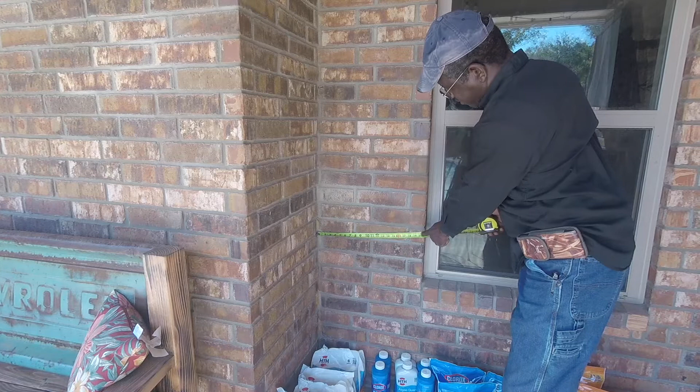One of the things here, this is 20, this is about 21 here. I'm gonna make it 20 that way, and then let's see, we've got probably right at 24 here.

So what I'm gonna do is try to stay within this section here. It'll be 20 inches across, 24 that way, and then probably make it about 36.

So if I make it about 36 tall, then about 18, which is about halfway, I'll probably put a shelf down at 18 inches. That way it'll have two levels.

I have some old reclaimed metal, so I'm gonna clean it up, get it measured, put it in the jig, and weld it up. I hadn't decided, since there are chemicals involved, whether to use expanded metal.

If I use expanded metal, I'll put a rubber cushion on there so it won't rust. If I decide to use wood, then we'll go the other route.

Right now I have reclaimed metal, 1x1 square tubing, very light because it's 14 gauge, and I already have expanded metal. If I use wood, I'll have to go buy some. But that's what we're gonna do here.

And then put all this in a pile and get it off the floor. So we'll see what happens. Okay, so that's kind of the idea I had.

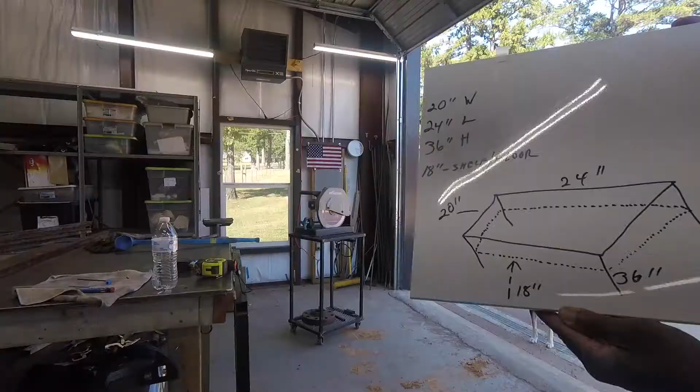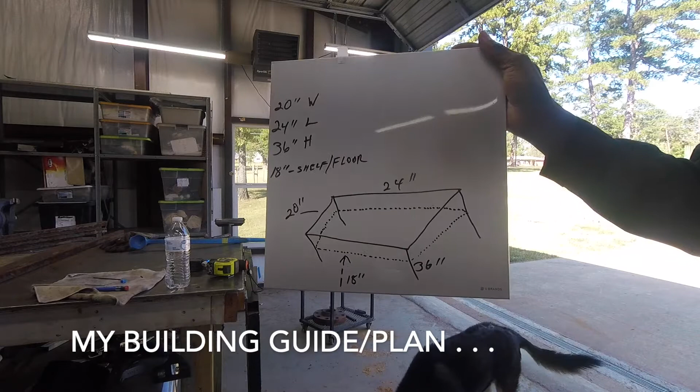That's just my rough draft there out of my brain, freestyle with just a black marker. Probably do better if I used some computer software, but I decided to do it like that.

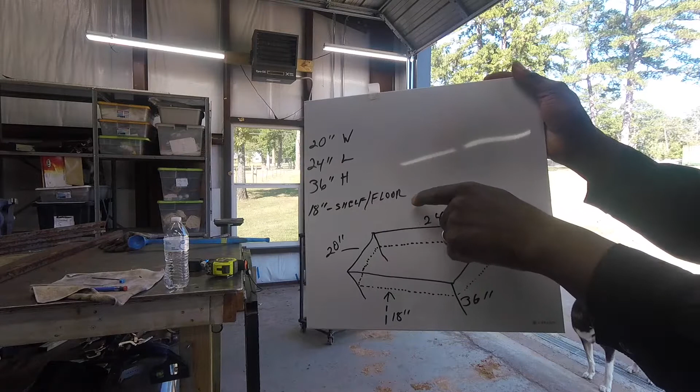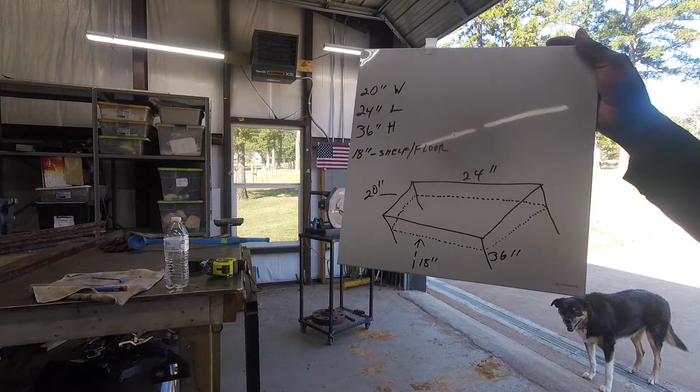Like I said, 18 inches from the floor will be my shelf, and 36 inches high from the top down to the floor, 24 long and 20 inches wide. Hopefully it'll come out like that when I get finished. If not, we can always cut it up and try something else.

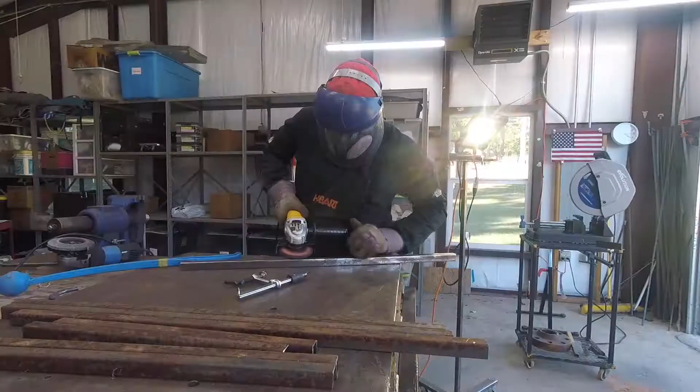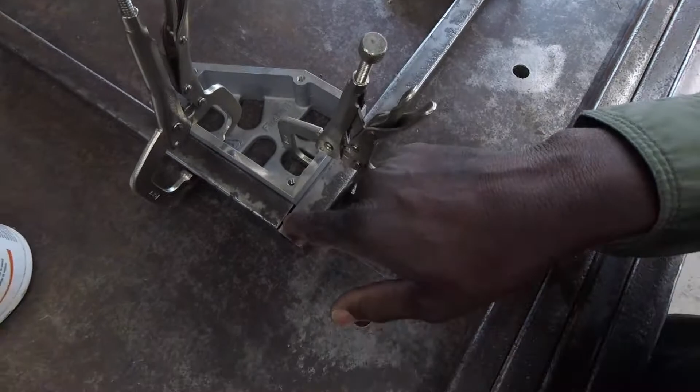All right, I'm gonna put a tack here, and probably on the outside. On the inside, I'm not gonna put anything because I'm gonna take these, put them in the corner, and tack those in the corner.

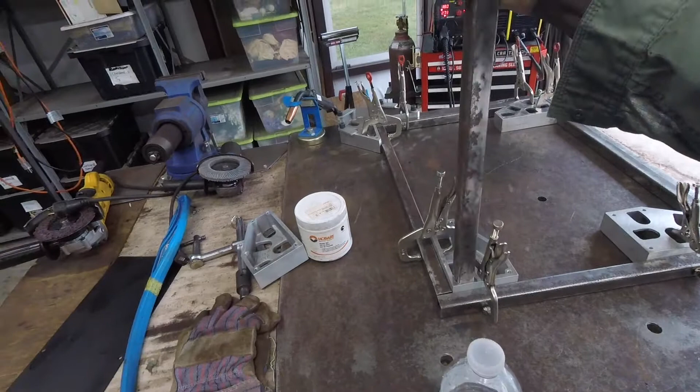So I don't have to grind the inside off, I'm not gonna worry about that. That way it'll fit flush up, it'll fit flush like that.

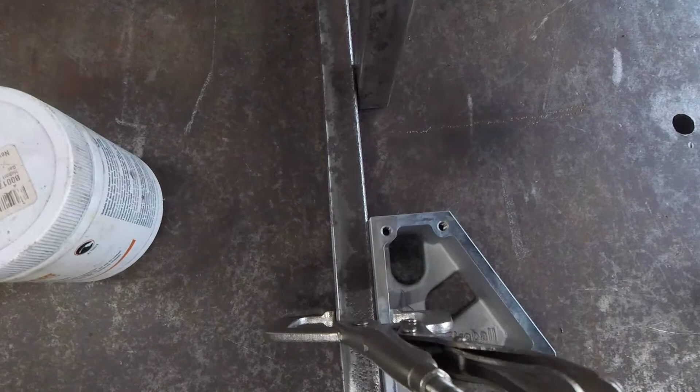I don't have to worry about trying to grind the weld off that piece there. So that's what I'm gonna put on the four corners.

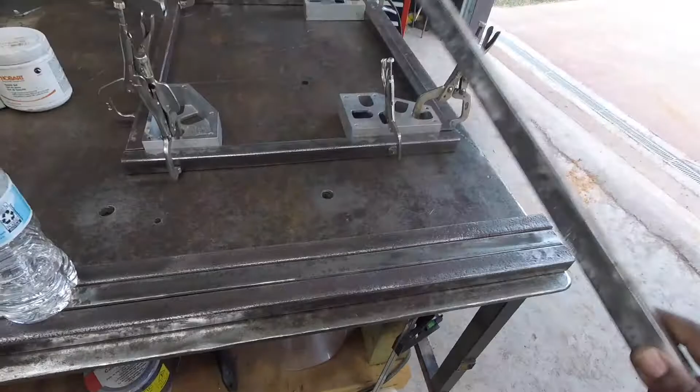Put these to the inside. Hopefully I can find a piece of wood to fit over the top. If not, I'll use expanded metal.

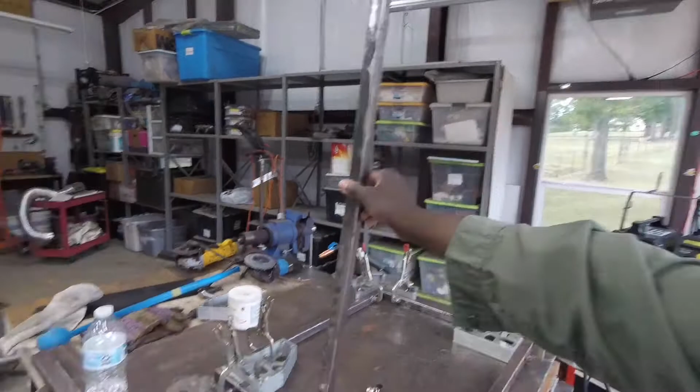And then we're gonna measure these about 18 inches from the floor down, and then try to put a shelf. I may use rebar because I don't have any more of this 14 gauge tube, so I may just use 3/8 rebar, depending on how much I've got over there in stock. Get it all cleaned up.

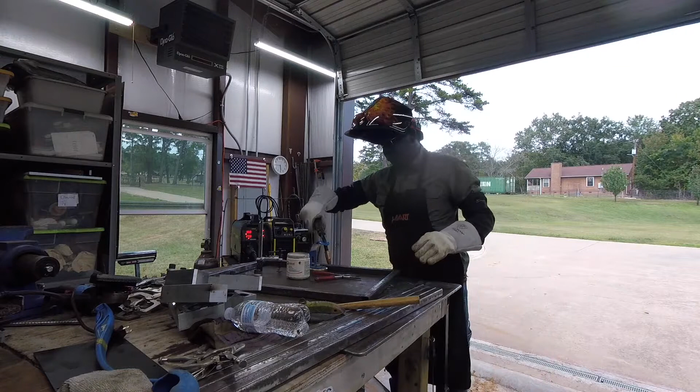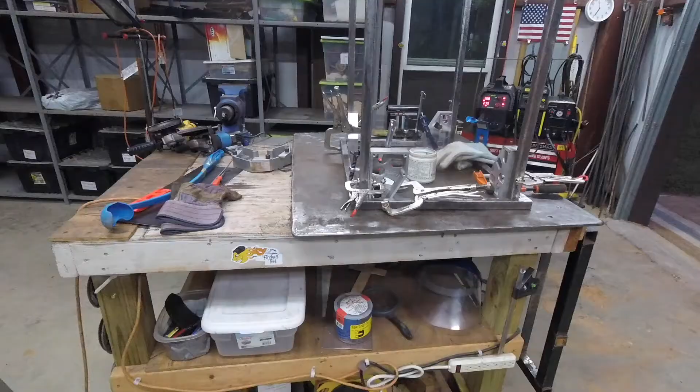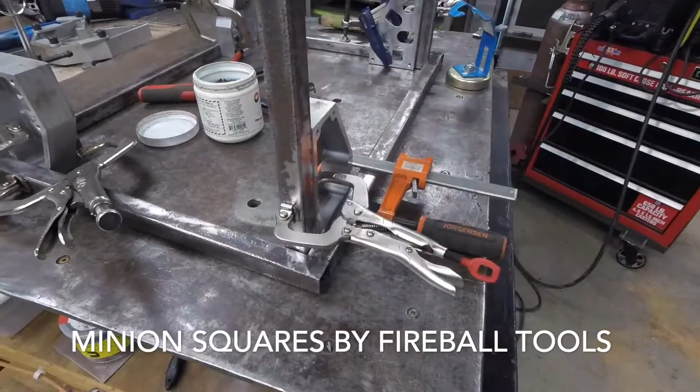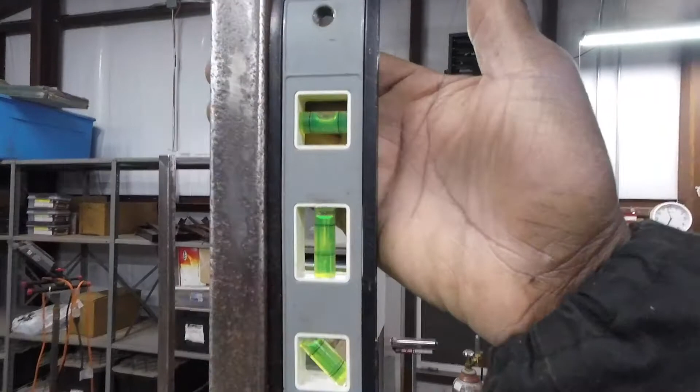Those clamps that I had on were to hold it down to the table, get a good ground when I start welding. Put the magnet up there. I did get it straight, that's been one of the problems I've had.

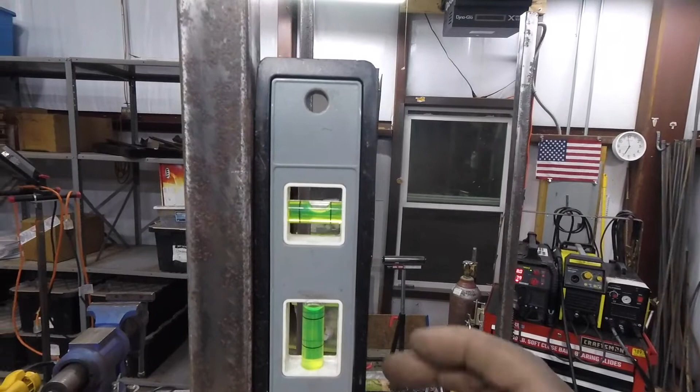Checked another leg, I did get it straight as well. So got it all clamped. We're gonna weld it up, tack it first, and then come back and weld it out. Very pleased how it came out, and glad I invested in the Mini Yon clamps.

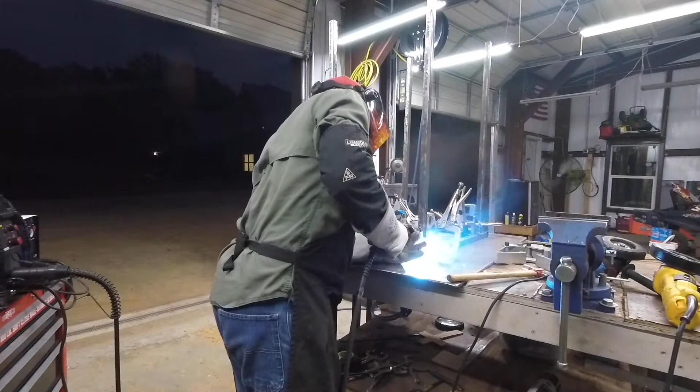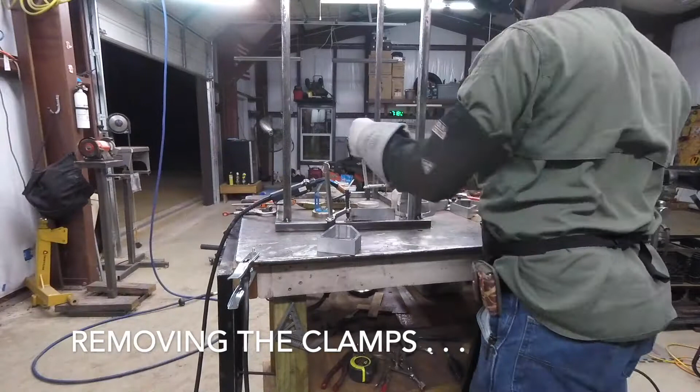Gonna tack it at each corner, and then what we'll do, we'll slide it over the legs, and that should pull the legs in, and then tack it on the 18-inch line that I have on the legs.

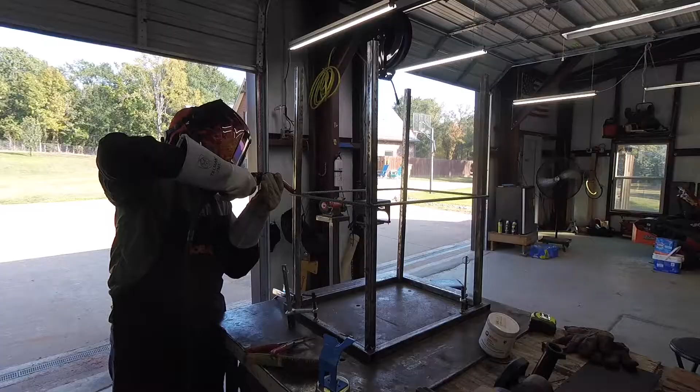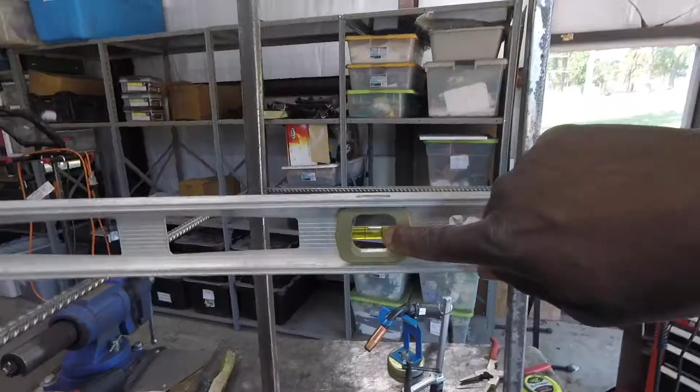Level here. Little level there on the back.

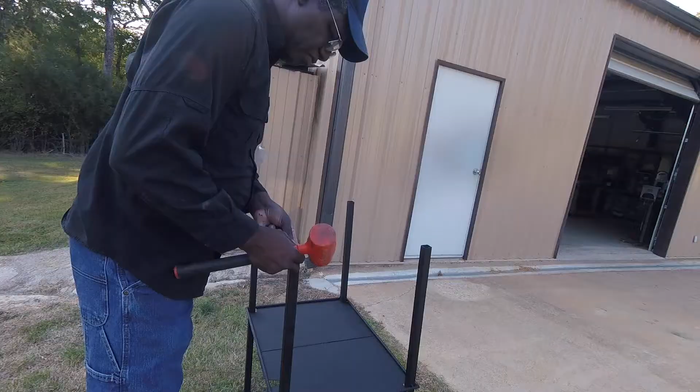Finally got everything done, got it all stacked. This is the muriatic acid to lower the pH and to lower the alkalinity. I'm going to leave those in the boxes, I'm not going to take those out.

I'm not going to worry about building anything because the cardboard is pretty thick. But all that mess you saw in the beginning, finally got it all stacked up nice and neat.

Put my little stoppers in here. So that came out pretty good. I've got to order some more of those.

But anyway, the shelf worked. I was able to stay within the line I wanted, and then I went higher. So I still have some more room if I need to do something else.

Pool shock and tablets on the bottom. That's some more pool shock that I'm going to switch to, because this one on the bottom has CYA in it and it keeps raising my cyanuric acid level, so I had to switch to that brand there.

I'll probably give the Clorox to one of my friends or somebody at church, something like that. But anyway, it's all there. Came out nice and neat, better than I expected.